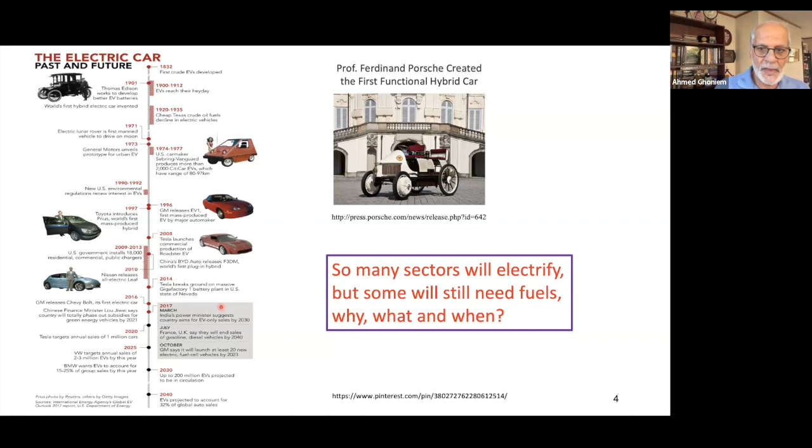So with this introduction, I remind you of two more things that I think are important to remember when we're thinking about energy transition. How much energy we currently consume, in what form, and where it comes from. So believe it or not, till today, after all the effort that we've put in, we still use fuels to produce 90% of our energy. Coal, oil, and gas come at the top. Next comes biomass, contributes about 10% of the energy worldwide. Then comes renewables and nuclear.

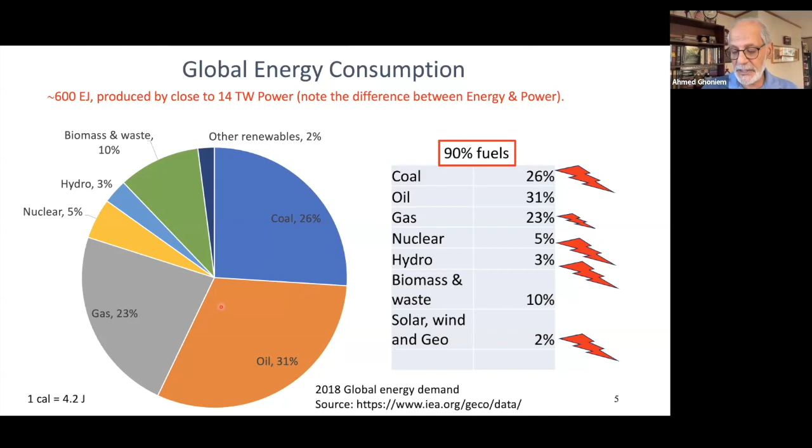What is the point here? The point here is fuels still play a very significant role in our energy production. Some of them are used to produce electricity that will likely be replaced with renewable and nuclear, but some of them are also used for transportation and other applications that we'll show in a second. So with the huge amount of energy we produce or we need to survive worldwide, and with 90% of them being fuel, we cannot completely, totally think that fuels will disappear.

Closer to home, here is our own consumption in the US, about 1/6 of the total world consumption. 82% of that consumption is still fuels. Again, coal, gas, and oil, and biomass. Biomass still represents about 40% of our total renewable energy consumption. So we reduced our dependency on coal significantly over the past 15 years. That was replaced by the renewables and natural gas. But still, that contribution of fuel to our consumption is massive. All right.

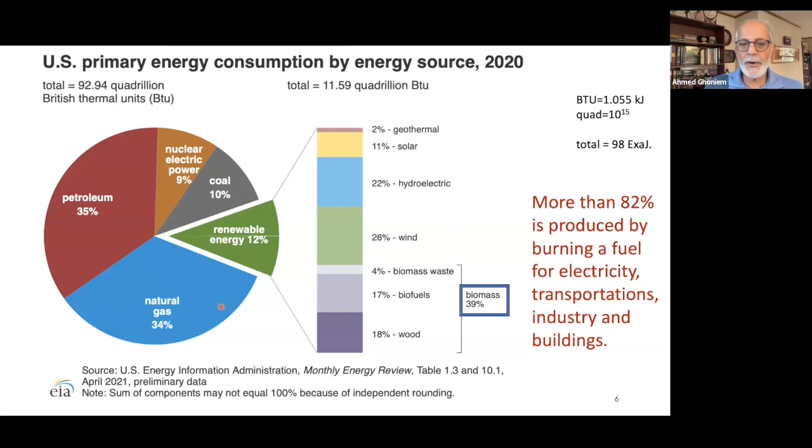We will electrify and we will continue to move away from fuels by using electricity. Maybe electricity will not be produced by fuel, but maybe it will be produced by fuel. But there are sectors in the economy that will be extremely difficult to move away from fuel. By the way, we call this tough to electrify or tough to decarbonize because we're thinking about decarbonization as getting away from fossil fuels that produce the transportation fuels. So there are sectors in the economy that will continue to be tough to decarbonize or tough to move away from fuels. And I'm showing them here in this slide.

Within the center, the toughest one to decarbonize, which we will call long distance or long-haul transportation. Transportation systems that move long distances without having access to refueling. Clearly, these are aviation, air transportation, ships that cross oceans, and long-haul trucks, the tractor trailers that have to go 1,000 and sometimes more than 1,000 miles in a single tank of fuel.

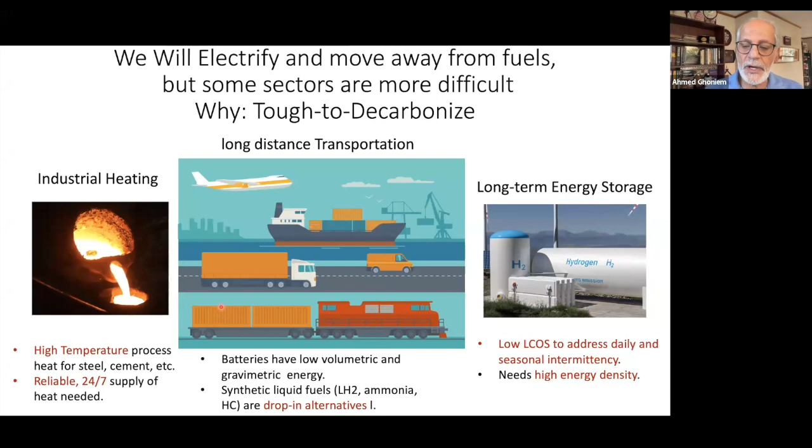The last one, I know many of you have been interested in the grid, is long-term energy storage. Long-term energy storage is important because the renewables that we are likely to depend more and more on, like wind and solar, are intermittent. And we may need storage of electricity or of energy that goes beyond days, maybe weeks, and even seasonal.

These tough to decarbonize sectors currently emit somewhere between 15 to 20% of the total CO2 worldwide. Depends on how you count and where you draw the boundaries and so on. So whether it is transportation or industry or what we call load following electricity that responds to intermittency. And here we're showing some of these numbers.

I apologize for showing too many numbers, as like many of you, I'm an engineer, and engineers work with numbers only. So it's very difficult to give a talk without throwing around all of these numbers. But they are kind of our guardrails, if you like. We like to take them to justify what we do.

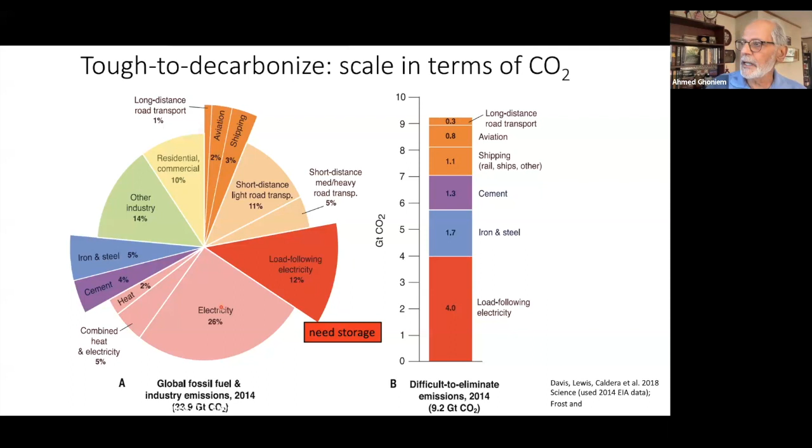So again, this slide is just meant to emphasize that the goal here is to decarbonize, and we need to look at sectors that will be tough to decarbonize using electricity and see how we can invent, if you like, new fuels, sustainable fuels that will replace those.

So again, because many of you I know and I've spoken to before are interested in the grid and how we're going to stabilize a grid that may rely more and more on intermittent sources like wind and solar. I will remind you that as wind and solar penetrate the grid more and more, to counter the intermittency, we will need storage beyond hours and even beyond days to sustain steady supply of electricity, and to prevent what we call curtailment, which is disconnecting the renewable sources.

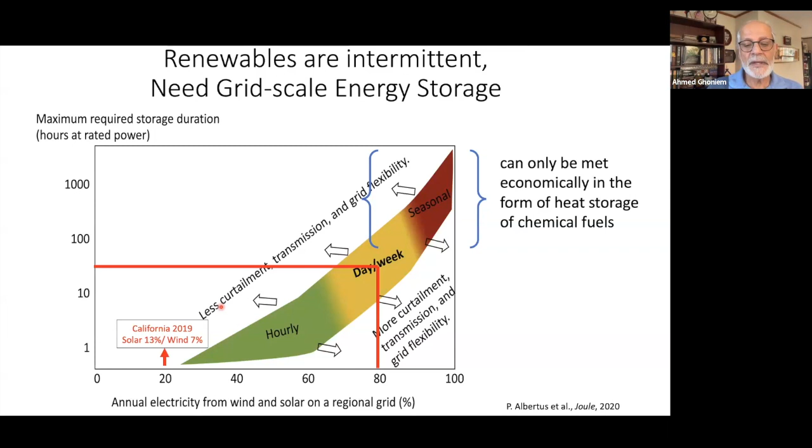So we need to have a way of storing that power being generated when we don't need it and store it in a way that we can use it over days, weeks, and months. And the higher the percentage of renewables in our grid, the longer the storage time may be needed. The very last part of this plot, which shows what we call the seasonal, but even days and weeks, having batteries to support storage over weeks and seasons may turn out to be very expensive.

All right, so I sort of assumed that you will all agree with me that flying on a battery is not possible. Flying a 747 on a battery, maybe flying a one-passenger plane is all right, but flying a 737 or 747. And again, sorry about it, but more numbers. Battery storage capacity, although it's improved enormously over the years, is still very limited compared to how much chemical energy can be stored in a fuel.

And even though the chemical energy converted to electricity or to power undergoes some reduction because of efficiency, still per unit mass of fuel, you can get 20 to 50 times more power than you can get from a lithium-ion battery.

So if you're concerned about the mass you're carrying or the volume you're carrying, there will be a limit to how big a battery you can put in if you are transporting things over long distances, because the battery will grow and grow and grow to take you the distance, and the word range anxiety will take on a very different meaning.

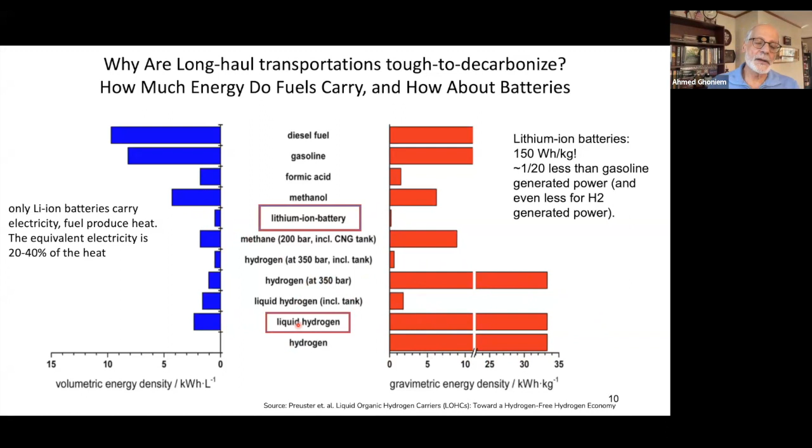So the slide really shows where lithium-ion batteries stand versus something like hydrogen or liquid hydrogen in particular, in terms of the amount of energy per unit mass you can carry. And you know, I don't need to tell you more about it. Of course, it's never as simple as just one number, because you also have to worry about the energy per unit volume. Sometimes the volume is even more important. But even then, with liquid hydrogen or liquid synthetic fuel, you go much further than you can go on a battery.

Especially when we think about the volumetric issues, how big the battery is volume-wise, which may be important in things like ships and planes. Again, liquefying the fuel or turning it from a liquid hydrogen, for instance, into something like methanol or ammonia will allow us to carry more energy per unit volume than we can ever be able to do in a battery.

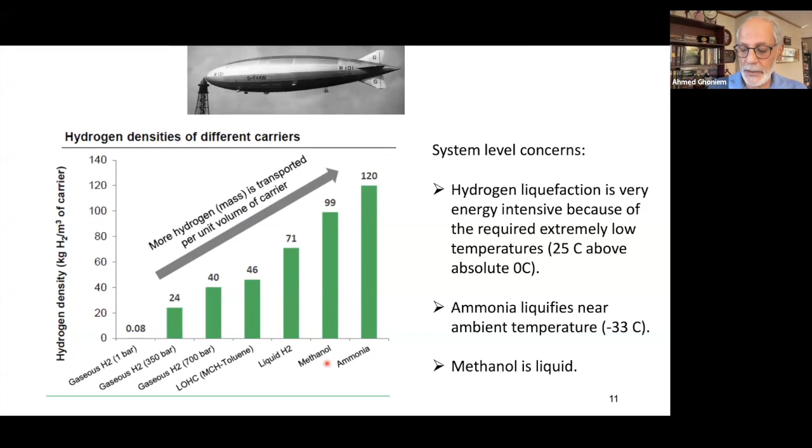Now, some of you might have heard that ammonia is currently being considered as a fuel. Indeed, it is, with all the complexities associated with it, but ammonia carries a lot of hydrogen in it. Ammonia is very easy to liquefy at temperatures reasonably close to ambient, versus hydrogen, which needs much lower temperature. So although we never think of ammonia as more than a fertilizer, it really is a fuel. And there's much need and much effort currently to look at how we can develop infrastructure as well as engines that can operate on ammonia. Methanol is another one of those as well.

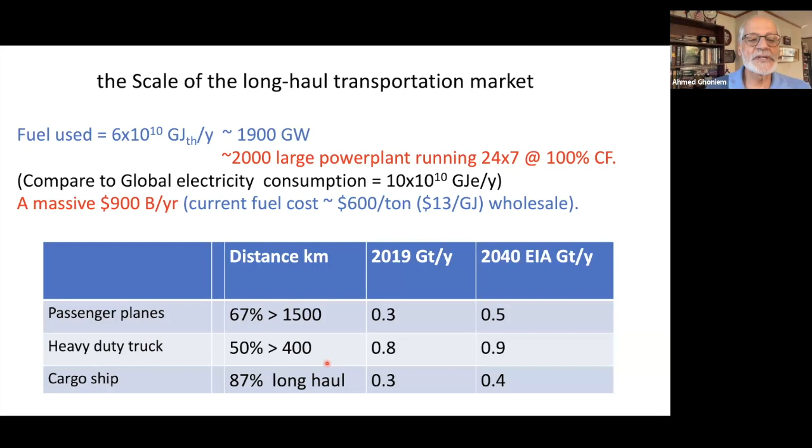Again, sorry about the numbers, but we're in the same place still. If you want to appreciate the magnitude of the complexity of long-haul transportation, if you take aviation, shipping, and long-haul transportation, this is a $900 billion per year market. Let me repeat that: $900 billion per year market. This is a massive market. Just to fly and to move across oceans and move long distances. So this is a market, just long distance transportation by itself, that cannot be ignored.

And again, as one last attempt to make my point about the need for fuels, take a long-haul tractor trailer that moves across country. Believe it or not, the current range for a tractor trailer is about 2,000 miles on a single fuel tank. The fuel tank is 300 gallons. If you're going to replace 300 gallons of diesel with batteries, it will be 6,000 gallon size. The weight of the diesel currently is about 1,000 kilograms. It will become 13,000 kilograms if it turns into batteries. If we replace it with hydrogen, it will be only 150 kilograms, about 1/10 of the weight of diesel, because hydrogen packs a lot more energy, and less than 1/100th of the weight of the battery.

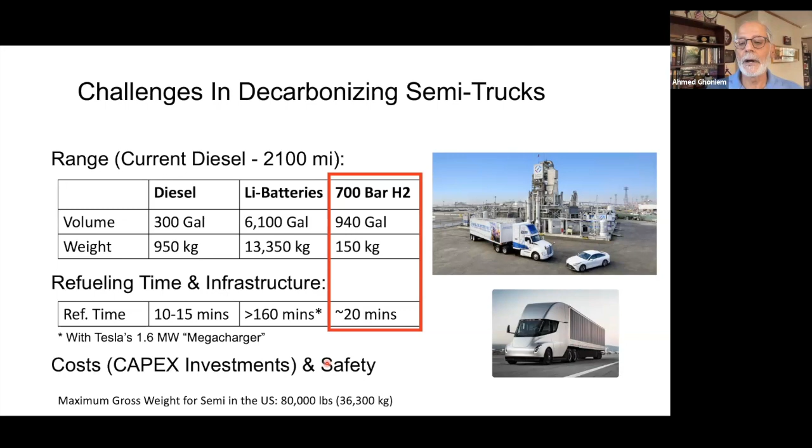Of course, volume is also important for long-haul trucks, because you want to carry goods instead of carrying fuel. So that's one example of why even the simplest one, which are trucks, will likely benefit greatly from switching to a fuel like hydrogen. And some of you may know that Toyota is already marketing a technology in that area.

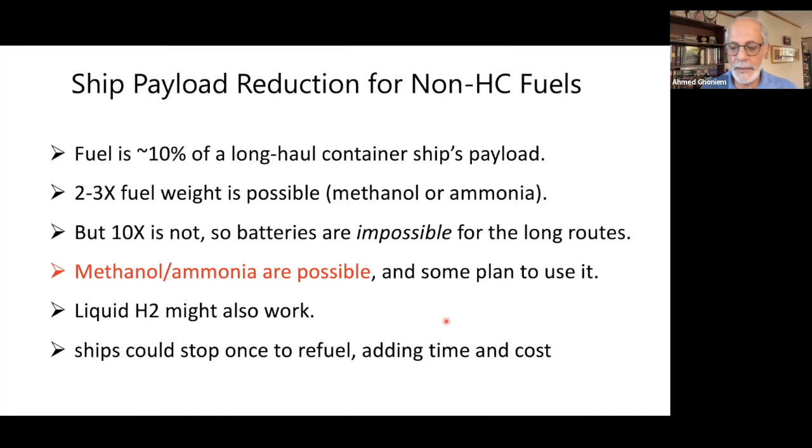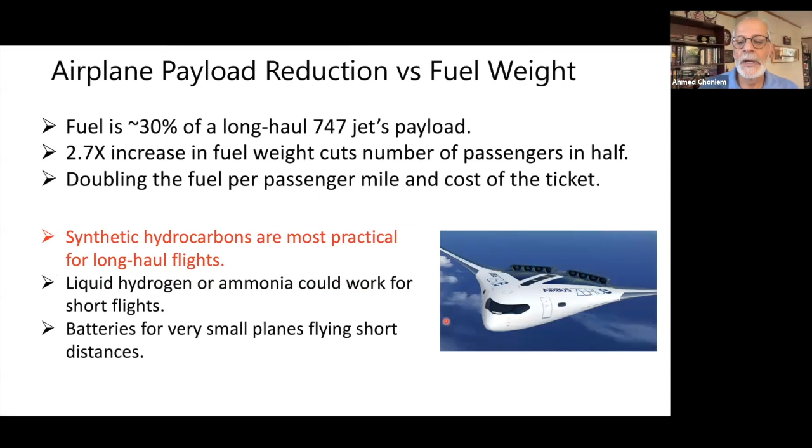I can spend more time on shipping and on aviation, but just because time is starting to run out and I need to get into some of the technologies, I'm just going to say in passing that for a typical ship, currently 10% of its weight is the fuel. If we're going to increase that by a factor of 10, we're out of the game. Nothing can be done. For big planes, 30% of the weight taking off is the weight of the fuel. So again, we cannot increase that by a factor of 3. It's just not going to work. A plane will need a fuel. It will need most likely liquid fuel, preferably synthetic liquid hydrocarbon fuel, in order to remain practical.

So, the current consensus is that hydrogen and its carriers and biofuels will be the replacement. Either you can use hydrogen as is, or you can use it as a part of a larger molecule, like methanol and ammonia. Or you can combine hydrogen with CO2 and form a synthetic hydrocarbon.

Well, that's fantastic, but hydrogen is not a fuel. Hydrogen is what we call an energy carrier. We need to produce hydrogen. It's not like we can drill a hole, although there's some evidence that there are some wells that may have hydrogen in them, but that's still very speculative and very early. For now, hydrogen has to be produced by some technology. Breaking up water, H2O, will give us hydrogen. Breaking up methane, CH4, will give us hydrogen. Or using heat or electricity from other sources can do either of those for us.

As I said before, you can combine hydrogen with CO2 to produce liquid fuels. That's a well-known technology. It's off the shelf. And you can combine hydrogen with nitrogen to produce ammonia. That's a very well-known technology. This was known as the Haber-Bosch process that we use to produce ammonia for fertilization.

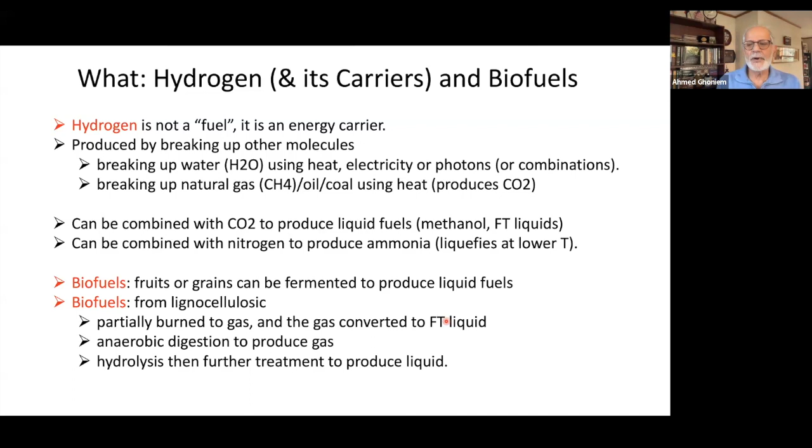But there's also another source of biofuels, which is known as lignocellulosic, which is the rest of the plant that can be converted also to fuel by several means. Some of them are again very much off-the-shelf technology, like gasification and anaerobic digestion or hydrolysis. All of these are ways to produce biofuels from lignocellulosic material from the plant.

Now let's talk about hydrogen production. And many of us recently have been using what's become known as the color wheel of hydrogen. It's an interesting issue, because it turns out there are many ways of producing hydrogen. You hear a lot about green hydrogen. Whenever you hear about green hydrogen, it is basically produced by renewable electricity. Renewable electricity and an electrolyzer will produce hydrogen.

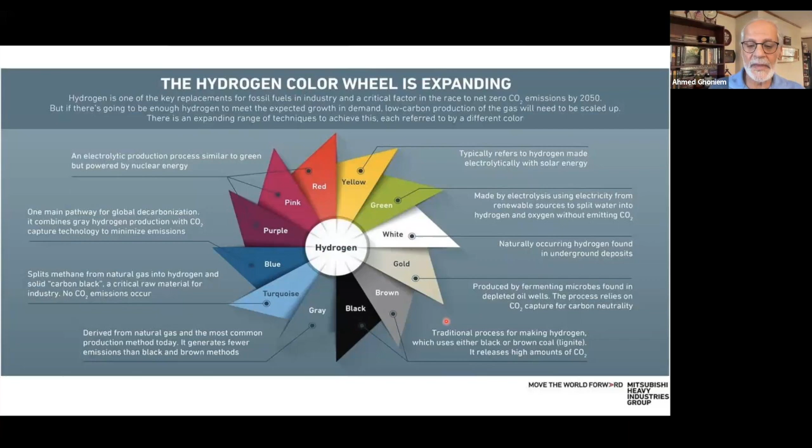So there are many ways of getting hydrogen. Some of them have some CO2, some of them don't, some of them sequester CO2, some of them get carbon out, and the jury is still out, so to speak, on where all of these will go. I'm sure you heard about some of them before. Some of them use electrolysis, electricity from the sun to break the water molecule, or photons from the sun, what's known as photoelectric or photoelectrochemical or photoelectrodes. And some of them use heat, just the heat from the sun.

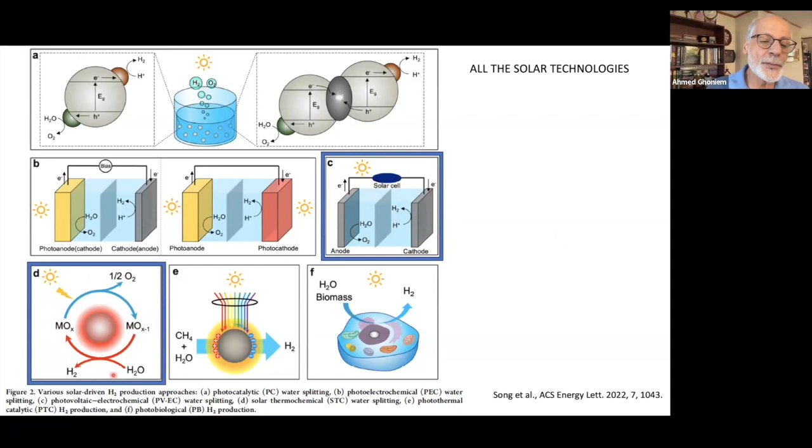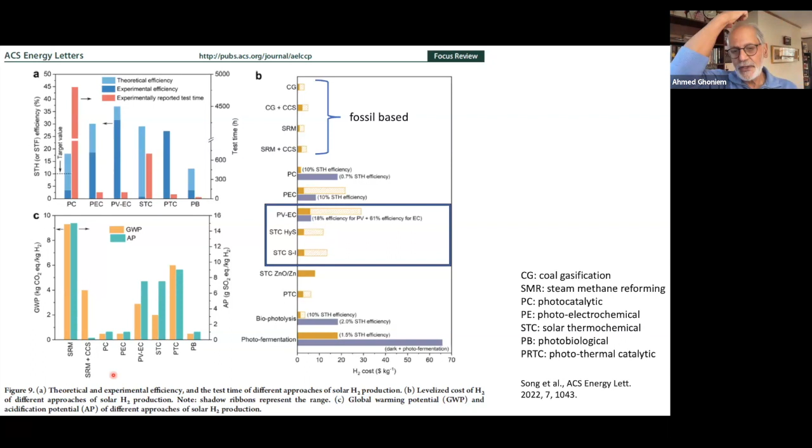The two most advanced are electrolysis, which uses electricity from the sun, and thermochemical, which uses heat from the sun instead of electricity to break up water molecules. And I will say a bit more about those in a couple of minutes. Before I do that, I will say that I focus on these two because they are currently the most economical. There are lots and lots of techno-economic studies in the literature that compare the prices among these approaches that largely show that electrolysis and thermochemical are currently the cheapest in the green category, the category that does not use fossil fuels. So in that sense, they are the most promising.

In electrolysis, we just get electricity from the sun, put it through a device that is the inverse of a fuel cell to break water into oxygen and hydrogen. It's a very mature technology. It's been around for more than 100 years. There have been a lot of improvements in it over the years, but this is a very traditional technology.

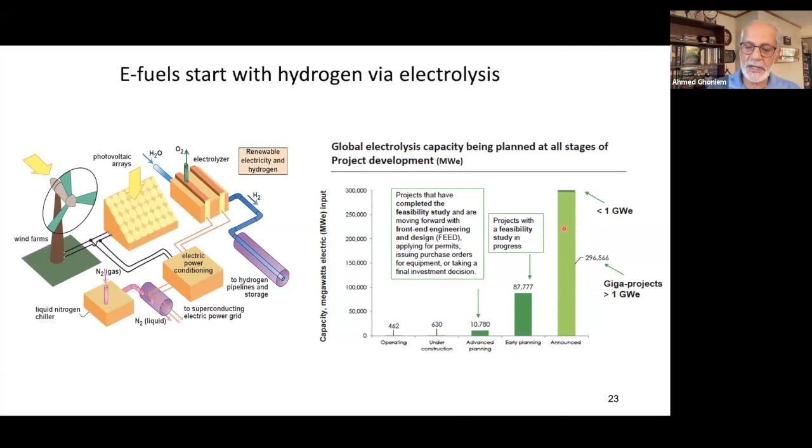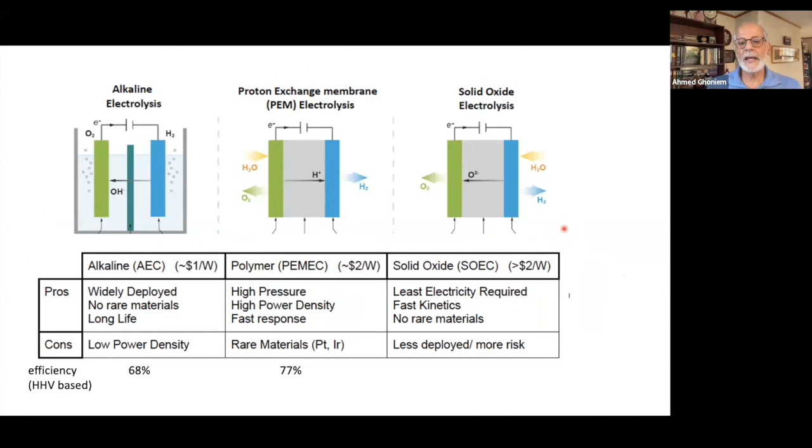Electrolysis, as I said before, is pretty mature. So it's almost off-the-shelf technology, although they come in different flavors and different varieties. And many companies have started looking at the scaling of these electrolyzers to provide hydrogen at scale.

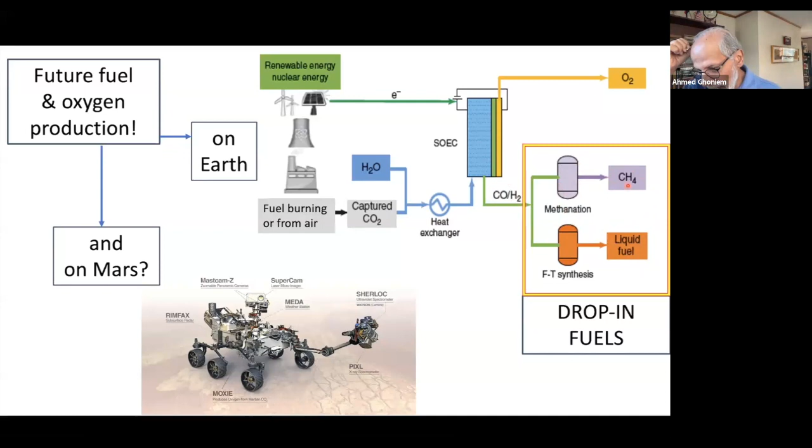On Earth, there's been a lot of effort in not only taking water and getting hydrogen from it, but also taking captured CO2, combining the hydrogen from water and the CO from captured CO2 to get CO and hydrogen, and putting them into different catalytic reactors to produce things like either liquid fuels or methane. So again, this is not happening now, but this is very much in the realm of technology that we can use.

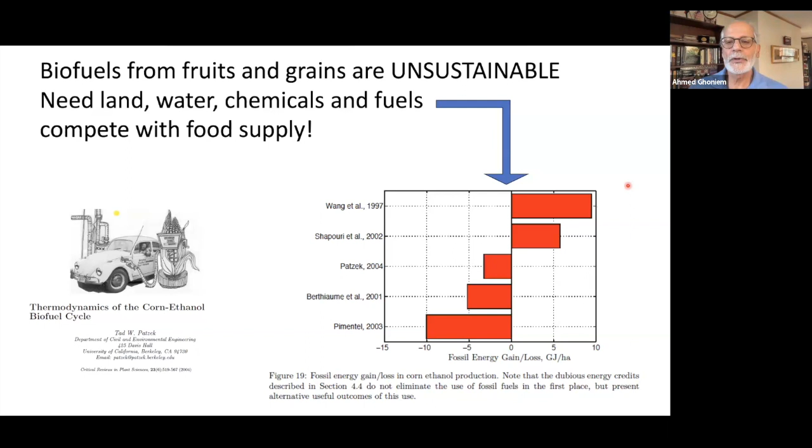I will just divert for just 1 second to talk about biofuels. Biofuels are largely produced, as I said before, by fermenting fruits and grains. This is not thought of as sustainable because fruits and grains take a lot of water, chemicals, and land to produce. But the more promising one is the one that will use the lignocellulosic component of biomass. And again, largely, this is a technology that is available. It has not been scaled, but it's available to be used to produce liquid fuels.

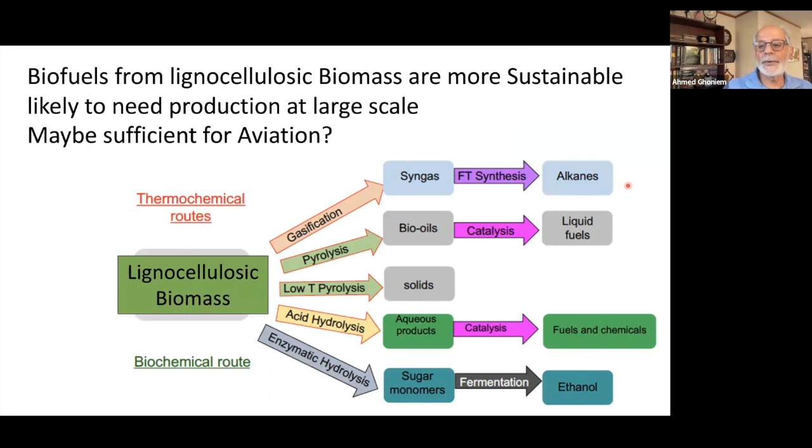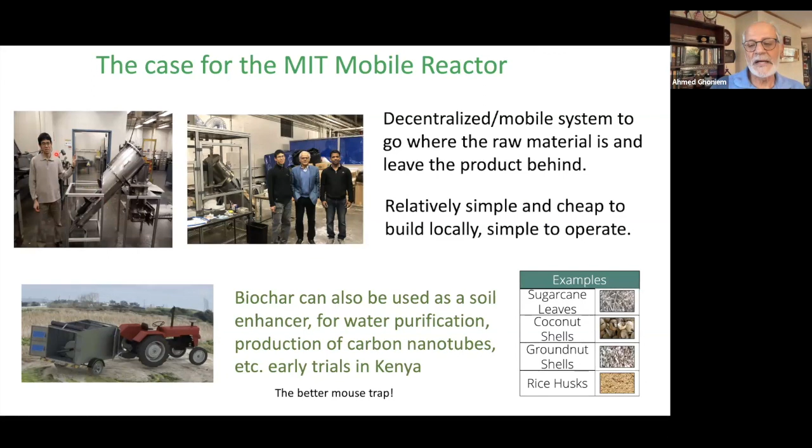And in the introductory remarks, I said that I had a project in my lab for producing solid fuels from biomass that was developed by one of my graduate students, Kevin Kung, who started a company called Takachar, and they have been competing well in producing these reactors in the marketplace and testing them and turning them into standard technology. But let me go back to hydrogen and hopefully wrap up in a few more minutes.

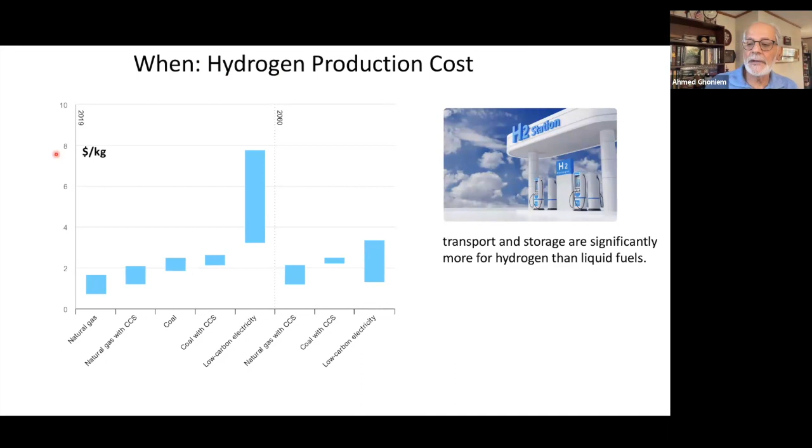Currently, hydrogen is very expensive, unfortunately, especially green hydrogen. Typically 1 kilogram of green hydrogen currently costs somewhere between $4 to $8 per kilogram. That, compared with less than $1 a kilogram of gasoline, is expensive. The hope is that in 20, 30, 40 years, we'll be able to reduce the cost by a factor of 2 to 3. In fact, many of the current initiatives are intended to do exactly that. The target is $1 per kilogram, maybe by 2050, maybe $2 per kilogram by 2030. So that's about 1/2 or 1/3 of the current prices by continuing to improve the existing technology as well as exploring alternatives.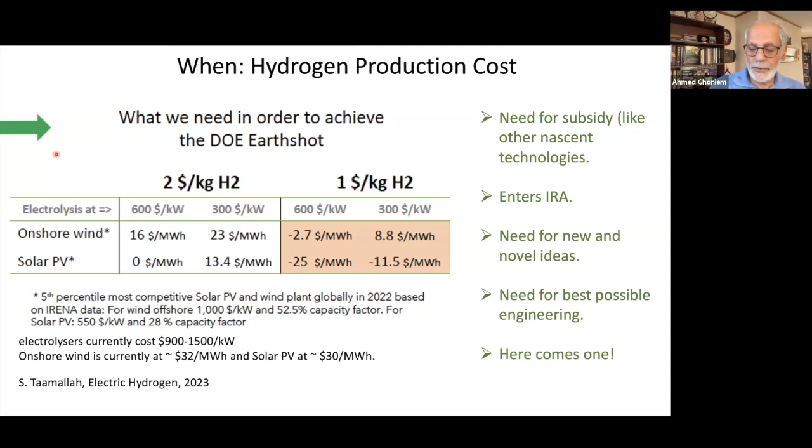Some of you might know that in the Inflation Reduction Act, there is an incentive of up to, if I remember correctly, about $3 per kilogram of hydrogen to make even current generation of hydrogen production technologies somewhat competitive. Of course, we want to work towards technologies that will not rely as much on incentives.

As one example, and now I get to my own research, work that's happening currently in my own lab, I have become interested in alternatives to electrolysis. So instead of using electricity from solar PVs to break up water through electrolysis, I became interested in using heat from the sun to break up water. And I became interested in it, not out of the blue, but because there's been several efforts in Europe in particular to advance this technology. And there have been several early demonstrations that this technology does have the potential of getting us to the cheap hydrogen we would like to get to.

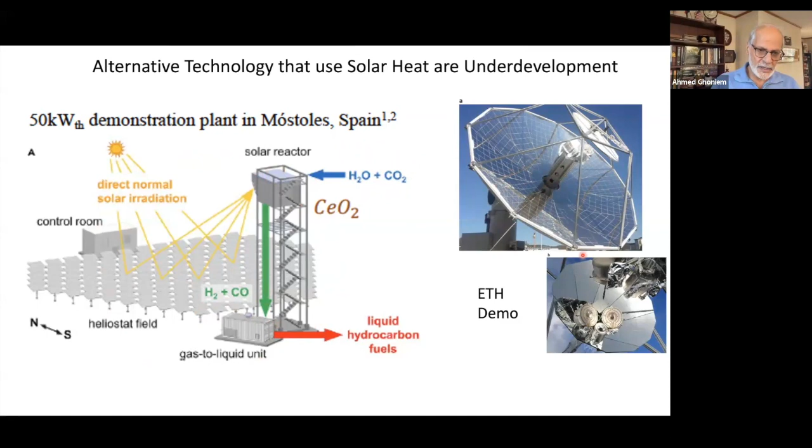In fact, this technology has an added advantage that it can work on both water splitting to produce hydrogen and CO2 splitting to produce CO at the same time, and produce a stream of gas, which is hydrogen plus CO, that can be converted to liquid in a catalytic reactor. This is a demo that was done in Spain about 4 years ago. This is a demo that's currently being done in Switzerland. And it's actually ongoing work that we're watching very keenly. The idea behind it is rather simple.

We all know that metals tend to rust. If you put a metal in water, take iron, it will rust. Why does it rust? It grabs oxygen from water and turns into metal oxide and releases the hydrogen. So that is the essence of this technology, that we want a metal that can grab oxygen from water quickly and release the hydrogen as a product of the process.

To make it quick, we need to raise the temperature. We need to run this system at high temperature to make the chemistry move faster. But once you rust the metal, you're not going to dispose of it. You want to de-rust it. You want to remove the oxygen from it.

To remove the oxygen from it, we move it to even higher temperature. We heat it even further up to release the oxygen from it, turn it back into a metal again, and take that metal and react it with water to get more hydrogen. It's known as a redox cycle, a reduction oxidation cycle, or a looping technology where we loop between high temperature to release oxygen and low temperature to rust the metal again and produce hydrogen.

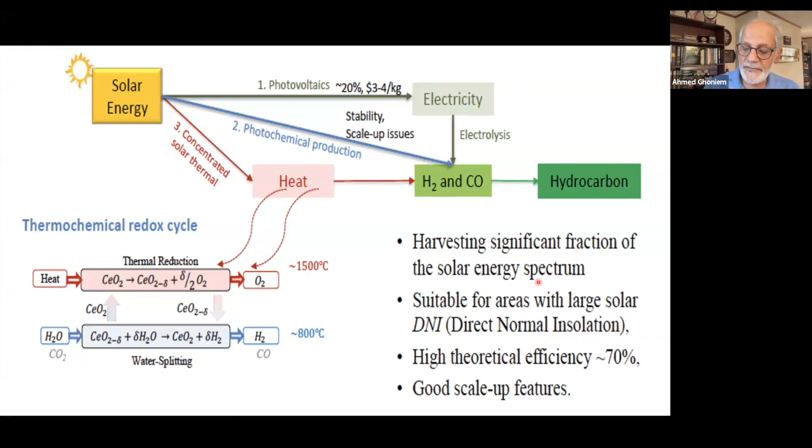This technology has a very high theoretical efficiency, about 70%, and work in my group has shown that we can build a practical system and get about 40% efficiency. And it's a complicated diagram for demonstrating why it should work. It shows that there's a very high temperature side that releases oxygen, and a low temperature side that reacts with water to produce hydrogen.

And what we've worked on is what I would call the critical engineering for the system to make it efficient. How do we make it efficient? When you take heat from the sun at high temperature to release oxygen, you want to keep as much of this heat that you paid so much to collect, while you're dropping the temperature from 1500 to 800 to produce hydrogen. If you just dump this heat, the efficiency goes down to a very low value, like 5%.

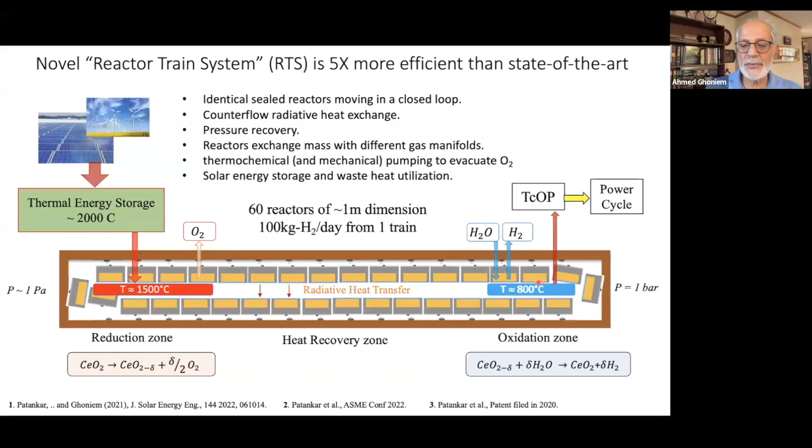If you take this heat and recycle it within your system, keep it within the system so that you can use it again and again, you can bring up the efficiency from 5% to about 40%. And that's what we designed in my group recently. So we think that by engineering the system better, we can improve that efficiency by a factor of 5, 6, 7, and that will get us to the cost we think will be competitive.

So that's another way of looking at this system, that we will have a collector concentrator of solar energy that will heat our reactor to release oxygen. The reactor will be cooled and react with water to produce hydrogen, get reheated internally again to go to the other side where we release the oxygen, and loop again.

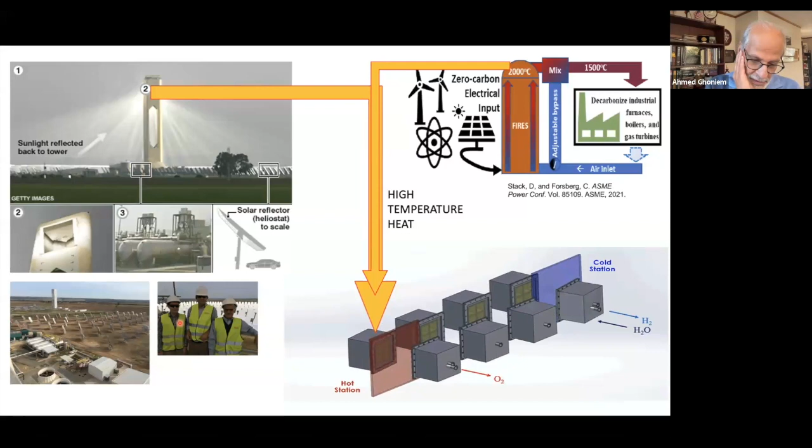I happen to have visited places in Spain where some of these experiments were run, and have seen in reality a similar system that we would like to duplicate, but implemented on the design that we've come up with recently.